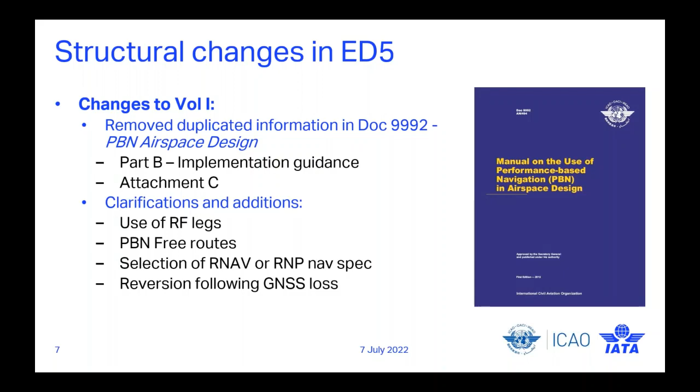There's been a number of clarifications and additions. So for example, there's information on the use of RF legs, on PBN in the free route concept, on the use of either an RNAV or an RNP nav spec, and some additional guidance on the use of GNSS reversion. I'm presenting a high-level overview at the moment; subsequent speakers will pick up on this in a little more detail. Next slide, please.

So one of the key changes that we made, and it's not immediately obvious, is the definition of area navigation. The existing definition in the PBN manual talks about a method of navigation that permits operation on a desired flight path within the coverage of ground and space-based navigation aids. And there's always been a note underneath that definition saying area navigation includes performance-based navigation as well as other RNAV operations. If you can hit the advance button, it should put a line through that.

So the intent of the change here is to remove that note, and have area navigation defining the method of operation on the desired flight path within the coverage area. But we no longer have reference to area navigation being PBN plus other. PBN has been around and established long enough that, apologies for the interruption there, we don't think area navigation includes other things apart from PBN. What we're saying is that if it's area navigation now, it should really be within the concept of PBN operations.

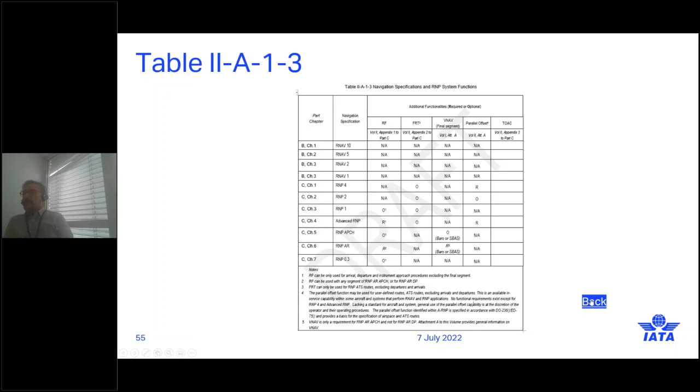Then there is another new table, which relates the navigation specification to the RNP system functions, and it clarifies whether the system function is not applicable, required or optional for the nav spec. So we expect this table also to be an improvement for the reading and comprehension of the manual. And here you have the cross references between

Benoit, your voice is lost.

We can go back maybe. So this is it for the global new tables. Maybe let's go to the next slide.

Okay, so use of RF. Since more and more aircraft are now RF capable, we saw that it was important to clarify the use, and in particular the judicious use of RF, especially for procedure designers who now use RF more frequently outside of RNP AR applications. So you have two sets of clarifications within volume 1 and volume 2.

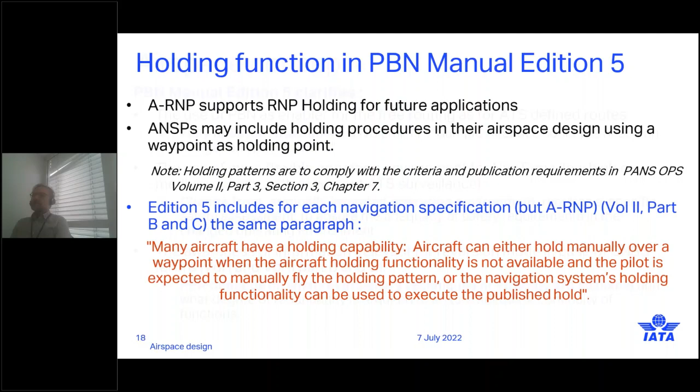So in terms of airspace concept, as pointed out by Ian before, here again we have a number of clarifications. First, the use of PBN as an enabler to free routes. So we have updated in this respect the attachment C of volume 2, which describes how you can implement this within your airspace. Another clarification is the use of more flexible operating environment for NavSpec with respect to the density of airspace and the capability of ATS to provide surveillance or not within the airspace. In particular, we clarify that if there is a change from the originally intended operating environment, this requires a specific safety assessment to ensure the adequacy of safety requirements.

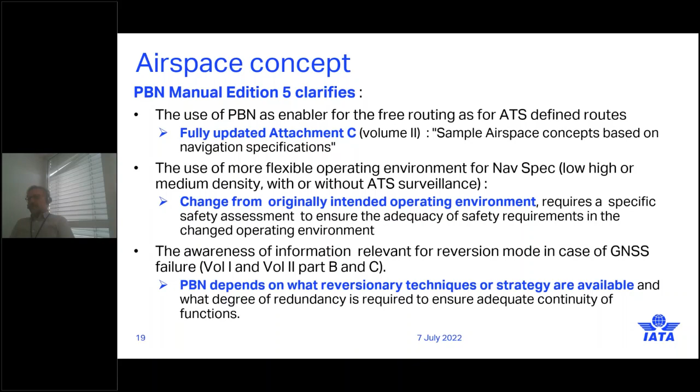We also provided some more information on an important topic for PBN implementation, which is the reversion mode in case of GNSS failure. Of course, PBN and airspace are intimately connected to the kind of reversion techniques or strategies that you are able to implement within your airspace. And this is important. I can confirm in Europe at the moment, we have a regulation, you are probably aware, at least European colleagues, we have PBN regulation, which sends us toward a 2030 timeframe where we would have exclusive use of PBN. In that context, it is extremely important to understand what happens when we lose the PBN navigation sensors. Next slide, please.

Then we have a clarification also on the capability of PBN to support different GNSS systems, and in particular the Annex 10 standardized augmentations. You probably know that in terms of GNSS, we have three standards within Annex 10, ABAS, GBAS, and SBAS. And there is even something new. We have new constellations. We had GPS and GLONASS up to now in Annex 10. Now we have BeiDou and Galileo, which are under approval, and the SARPs should be applicable in November 2023. So you see this is coming.

We have new signals in the air. We have new SARPs. We have avionics manufacturers which start to work now around this DFMC avionics. So we thought it was important to clarify how this new DFMC avionics could be used versus edition 5 provisions. So we clarify the application of DFMC, the use of DFMC SBAS and ABAS to support existing navigation specifications.

As pointed out by Ian previously, GBAS positioning service has been added as a consistent sensor to support navigation specifications in terminal airspace. And important to note as well, GBAS for the final approach, which is the main application of GBAS, is still treated similar to ILS, and so it remains within the domain of AWO manual. It has not been included as a PBN sensor here.

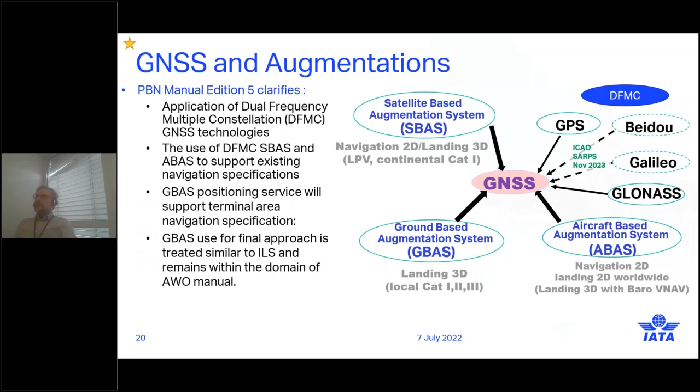So in this next section, what we'd like to talk about is the changes that have been made to Volume 2, and that will be myself talking about advanced RNP. Barry will then talk a little bit about the RNP AR operations, and it'll be David Zaytouni this afternoon who'll be picking up MAGVAR. So getting back to advanced RNP, this is not a new specification. It's been in the manual since edition 4 in 2013, when it was introduced primarily to try and consolidate some of the navigation requirements and simplify the aircraft certification process.

We spoke at the time of trying to bundle some of the existing airworthiness approvals for the various navigation specifications into one specification that would do it all. I think on reflection and with the benefit of hindsight, it didn't really make a significant difference from an ATM perspective, and I think because of that, there wasn't any impetus really behind the introduction of advanced RNP as a nav spec in its own right. It certainly made the job, I think, for the major OEMs easier, because they could now declare advanced RNP rather than having to declare all of the separate nav specs. But I don't think it really took off in the way that we had perhaps envisaged it might in terms of the application.

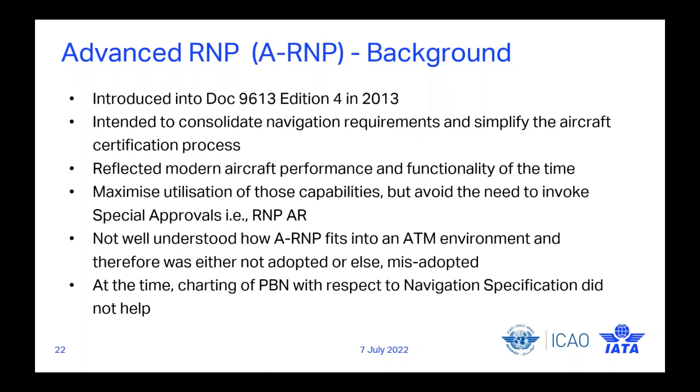So within edition 5, we felt the need to provide further explanation on how to implement advanced RNP. And in edition 5, we now have an appendix included within volume 2, part C, chapter 4, which is advanced RNP, which really gives you more scope and applicability, but also addresses the stakeholder considerations. And those are stakeholders such as the states, the operators, and the original equipment manufacturers.

We've also put some guidance in there for the regulator and the equipment standards in terms of, again, where advanced RNP sits with that material. One of the changes that we've introduced here is we've removed the final approach segment from the scope of the nav spec. So we've made advanced RNP really sit outside of the final approach segment, and then you conduct that final approach segment either through the RNP approach nav spec, RNP AR approach, or with an xLS, that's an ILS, MLS, or GLS.

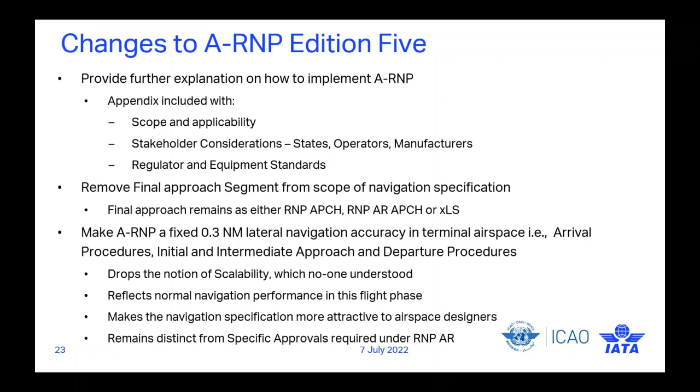And we feel that by doing these changes, we're making the nav spec more attractive to the airspace designer, where advanced RNP could stand alone as a distinct specification, rather than just having this bundling of RNP 1 and RF and other features. But what I would say is that it doesn't go as far as RNP AR. That is still a very distinct navigation specification, which will require a specific approval. But I'll talk a little bit more about the approvals for advanced RNP in a minute. Next slide, please.

But we did put the scope in there that there could be an individual safety case for the missed approach, given a certain number of considerations to reduce the lateral accuracy down to 0.3. But the normal case would be a missed approach of 1 nautical mile lateral navigation accuracy, exceptionally 0.3 subject to safety case. Next slide, please.

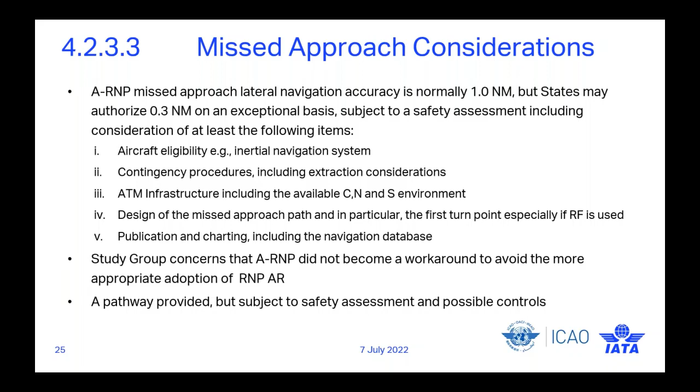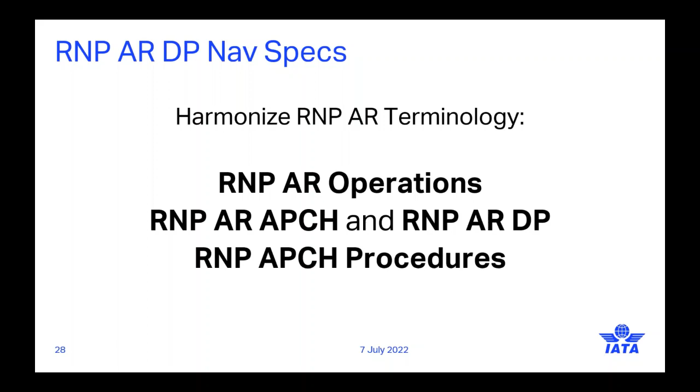One of the major issues we had was just simple terminology. So as we put Chapter 6 back together to embrace both RNP AR APCH and RNP AR DP, we tried to take care in our description of the navigation specification to distinguish between RNP AR operations and actual RNP APCH procedures as well. So there was a major effort to clean up and put much of the navigation specifications in better harmony with very clear, direct statements assigning responsibility and trying to embrace the distinctions between the operations and the procedures themselves. Next slide, please.

So what we did, in this effort to embrace RNP AR DP nav specs, was we wanted to make sure that we were taking care to merge the aircraft's takeoff and climb performance with the aircraft's navigation performance. So around the world, some of you may know that we've had quite a bit of experience with special RNP AR departure procedures, proprietary RNP departure procedures, as well as a variety of states have implemented quite a number of RNP AR approach operations in support of public operations.

But we took careful consideration, based on feedback we received from many with regard to the special RNP AR departure procedures, and we came to consensus that we were going to limit RNP AR DPs to the application of an accuracy value of RNP 0.30. On top of that, we tried to make sure that the new navigation specifications for RNP AR DP embraced the aircraft type certificate requirements that regulators embrace for takeoff and climb performance, including one engine inoperative performance.

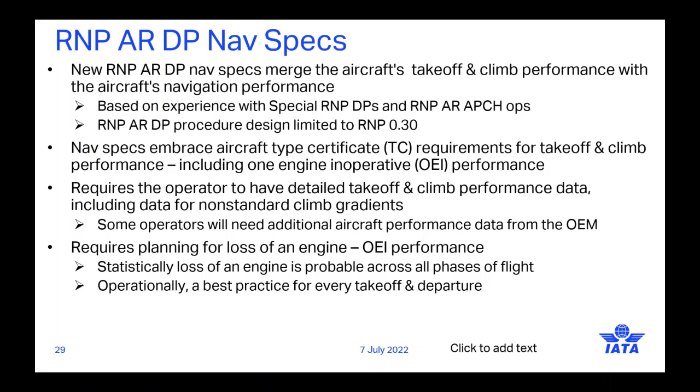So the concern became, how do we express the requirement to extract the aircraft from a demanding RNP AR DP when there's one engine inoperative? So what we decided to do was embrace the manner in which many operators around the world conduct day-to-day operations from many challenging airports. So we want to ensure through the nav spec that the operator shall be able to embrace the aircraft's ability to either fly the RNP AR DP's defined procedural path after experiencing loss of an engine, or offer other options as mitigations for the operation when one engine fails.

Essentially what we did was we based it on the success we've had here in the United States with FAA AC 120-91, which is titled Airport Obstacle Analysis. The other major concern that we had with RNP AR DPs was what type of aircraft eligibility requirements are necessary to support close-in turns. So we got a lot of feedback from the avionics and aircraft manufacturers that formed the foundation for the new definition within the DP nav specs to perform such close-in turns.

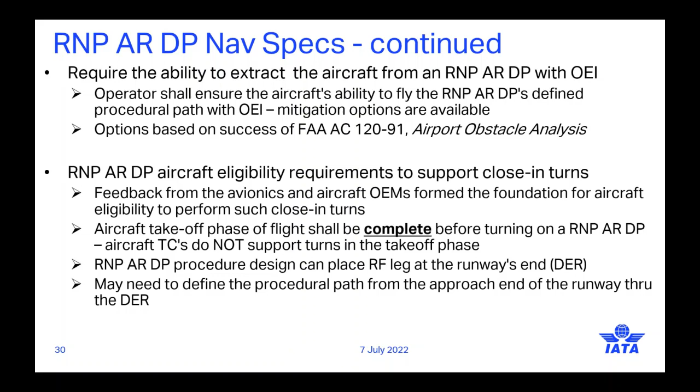We also took careful care to try to work with the new criteria working group of the IFPP, and some of the feedback we got from those proprietary special RNP DPs that exist today. And as a result of discussions and debate, we wound up that whenever the RNP AR departure procedure requires the use of an RNP value less than 1.0, the RF turn bank angle shall be limited to a maximum bank of 20 degrees.

One of the major concerns we had was trying to ensure that the RNP AR DP nav spec embraces the maximum number of aircraft eligible for RNP AR APCH, RNP AR approach, and as a result, by limiting the bank angle to 20 degrees, we believe we're capturing all of the aircraft that are eligible for RNP AR approach today. What this does is it provides, based on the existing performance of the aircraft eligible for RNP AR approach, a 5-degree buffer in the available bank angle that allows the RNP system to correct to the path when it encounters any disturbances taking it potentially off the path.

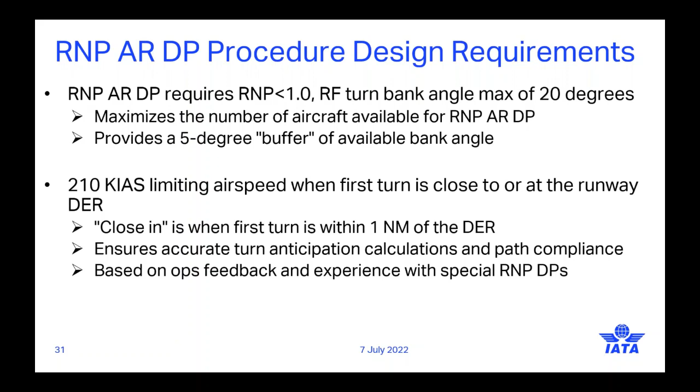The other thing that I want to emphasize is that while we do embrace one engine inoperative performance, the RNP AR DP procedure design shall consider the normal performance of the airplane. In other words, it's not the job of the procedure designer to decide what type of contingency plans the operator shall develop in order to embrace concerns about loss of an engine.

So as a result of that, we try to clarify that in the navigation specifications and provide those options to the operator for considering and planning for loss of an engine. Of course, I already mentioned you can fly the published RNP AR departure procedure with one engine inoperative. You plan your aircraft's takeoff and climb performance to ensure you can stay on the path.

In today's proprietary special RNP departure procedures, it is very, very common that the operators conducting those procedures limit the load of the aircraft to ensure that they can fly it should there be a loss of an engine anytime after the takeoff is committed. However, there is flexibility in other options that can support a safety case to conduct RNP AR departure procedures.

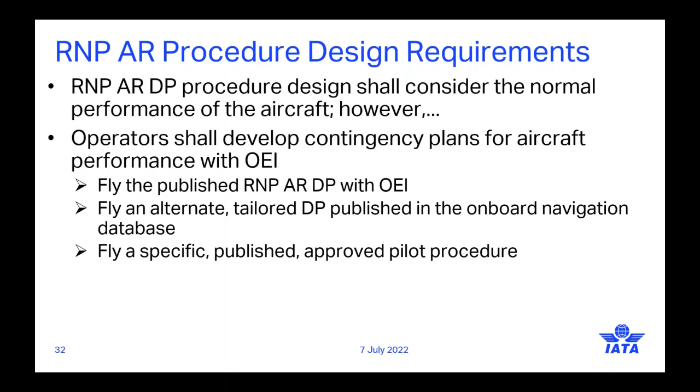or what many operators have today for many of the operations from specific airports, their guidance for their flight crews, such that a pilot procedure, for example, a turn to a heading and a climb to a specific altitude to get the aircraft to a minimum safe altitude. That too is a credible operation during an RNP AR DP when an engine failure occurs. Next slide, please.

Along with the major updates that we did to Chapter 6 to embrace the introduction of RNP AR departure procedures, many of the states and operators were concerned about what type of flight operational safety assessment need be done in order to support implementation of safe RNP AR ops. So as part of that, we made a new section in Chapter 6 of Volume 2 that embraces RNP AR operations

and FOSA. The issue we had was ICAO doesn't have guidance for non-public RNP procedures or special proprietary RNP procedures that are in service around the world in many, many states. So we offered guidance to the states on how they may apply FOSA to these non-public proprietary special RNP procedures that are in many cases non-compliant with the RNP AR procedure design criteria in Document 9905 and may or may not be consistent with the state's RNP design criteria that they may have for their particular implementation.

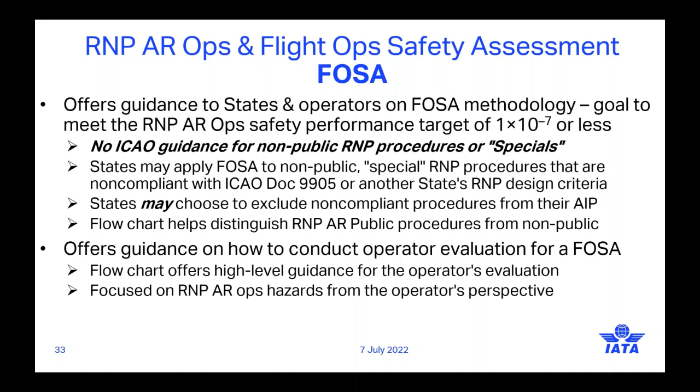Thank you. Next slide.

Another update we made to the manual to hopefully offer some clarity to the users of the manual was a lot of confusion about VNAV, vertical navigation in the final approach segment. We had an Attachment A that offered for years clarity on both the airworthiness and the operations approval basis for use of barometric VNAV vertical guidance during RNP approach operation. But that specifically just focused on baro VNAV.

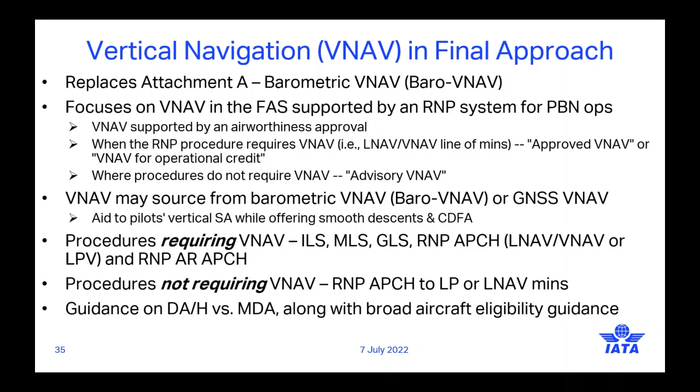Another issue we had all along with the manual was confusion about onboard performance monitoring and alerting, or what euphemistically is called OBPMA and its concept. Fundamentally, what we did was we took a look at Volume 1 and Volume 2 references to onboard performance monitoring and alerting, and we made sure that we weren't corrupting the original concept that is in today's manual.

But what we did do was we tried to offer some clarity by refining the description of OBPMA to ensure that we're making it clear that the key issue is, at the aircraft level, to ensure that the RNP system on that aircraft meets the required navigation performance for any given navigation specification where this critical component of the aircraft implementation is needed. We want to ensure that there's lateral and longitudinal navigation performance available during the operation, and that the flight crew knows when that's no longer available.

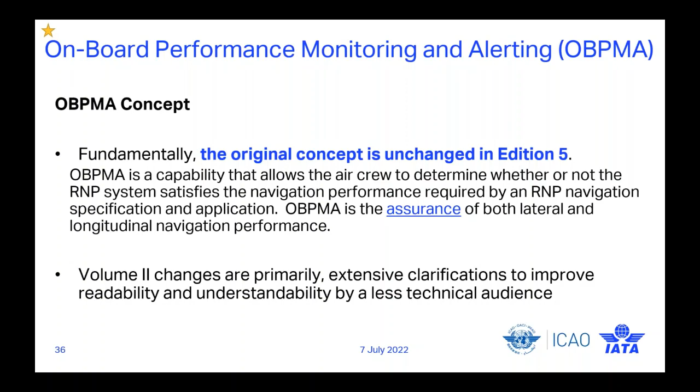So I want to talk about magnetic variation, otherwise known as MAGVAR. Up to and including PBN Manual Edition 4, information and the description of MAGVAR was mostly limited to identifying it as a factor in some of the PBN functional capabilities. There wasn't a lot of formal information about MAGVAR in the manual. Over the years, a number of in-service problems were observed, some of them significant. This led to efforts for the industry to consider these problems and offer MAGVAR standards and guidance improvements.

That was done primarily through the FAA in the Performance-Based Operations Aviation Rulemaking Committee, and those efforts helped develop into new equipment standards. Those standards primarily exist in documents such as the RTCA and EUROCAE Minimum Aviation System Performance Standards and Minimum Operational Performance Standards for RNAV, RNP and RNAV. Those document numbers are DO-236 and ED-75 for the MASPS, and DO-283 and ED-76 for the MOPS. So there were a lot of improvements in those manuals.

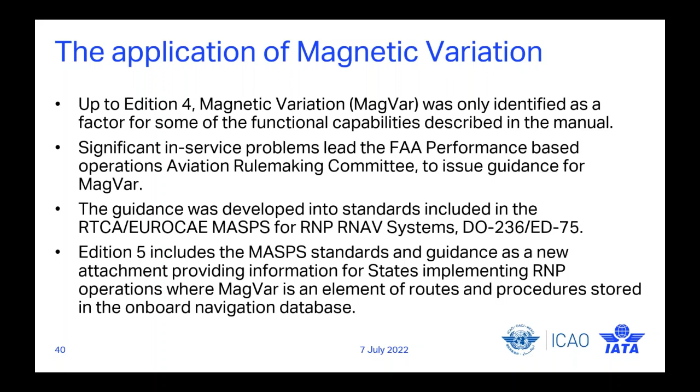So Edition 5 provides some clarifications and additional description and material related to how MAGVAR selection is performed in the avionics equipment, such as the flight management system, and it covers a number of different cases. Those cases, as an example, include things like how MAGVAR is treated at an airport, how it's treated on a PBN instrument procedure, how navaids are used, station declination, etc.

And that applies to how the specific flight management system then applies MAGVARs to what we call leg types. These leg types are how the flight management system puts together procedures, typically in the terminal area, as they're described from procedure designers coming from the States. The leg types that are impacted by MAGVAR are things like the course to fix leg, or course from a fix to an altitude, those types of legs, and holding. Those are all actually impacted by MAGVAR, and we've provided additional guidance material in the PBN manual.

Even with these updates that we made to the manual, there are still a number of inconsistencies within the industry that exist due to the legacy behaviors of certain equipment and how MAGVAR is used, and the fact that MAGVAR changes at certain airports at different rates. All of those factors contribute to the fact that there will still be some problems seen out there in the real world with respect to MAGVAR, but we hope to have improved a number of them by explaining how they work in Edition 5.